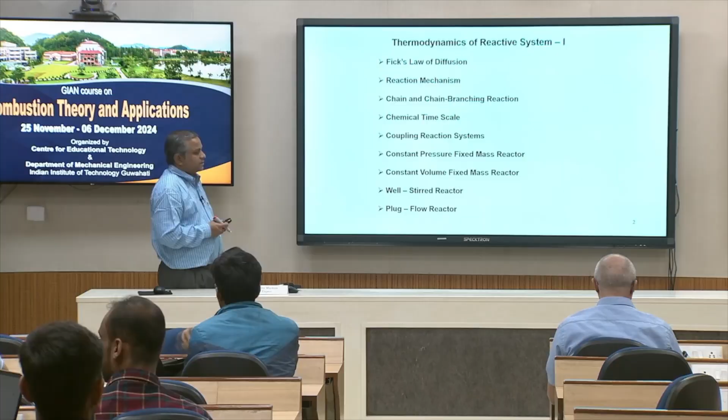In this lecture, I am going to introduce these combustion reactive systems, where we'll try to introduce other conceptual reactions which we normally call elementary reactions and global reactions.

Elementary reactions are basically those reactions that are formed during the species formations, and global reaction is what you see when the reaction gets completed as a whole. Global reactions we dealt with in our previous lecture, either a lean mixture or rich mixture, in which you find either CO or NO, or excess oxygen depending on the mixture composition.

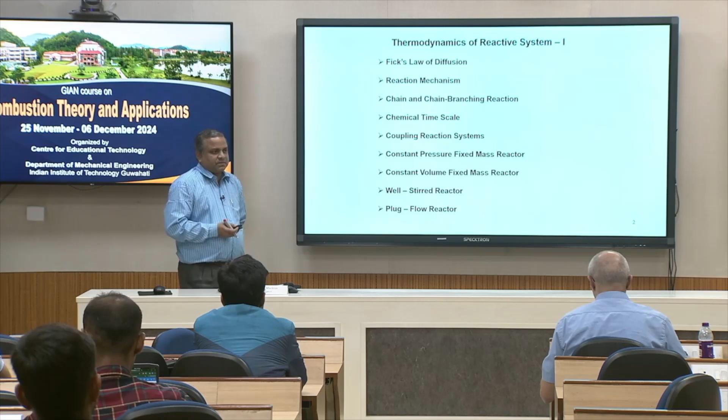This is one part of the analysis. Then the other part is we will try to introduce reaction mechanisms, which take care of how, for the formation of elementary and global reactions, we want to see what are the possible ways, depending on the pressure and temperature ambient condition in the reactor, different species are formed.

In a certain situation, whether it is favorable for CO or NO formation, the reaction proceeds based on this. In some cases these reactions are either chain reactions or the chain also gets branched, so chain branching reactions.

Next important point is chemical time scale. If you look at the instantaneous ignition event, it lasts for about a nanosecond or maybe a microsecond range, and in that ignition period the combustion takes place.

That means the entire duration of combustion, starting from fuel and air, when ignition starts, all of a sudden we see the products as a whole, which is the combustion products. But in between, the formation of products—how fast it forms—that is the question: what is the reaction time?

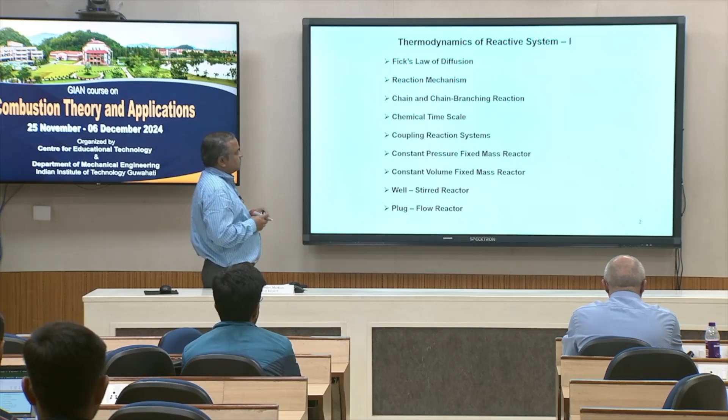Then coupling reactions—there are different ways we can model these reaction systems, and when we talk about coupling reaction systems, it is basically to analyze thermodynamic concepts for how we are going to introduce this reaction analysis.

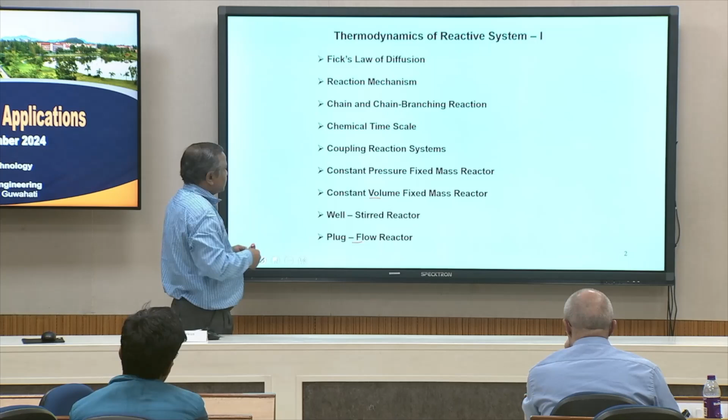One such model is the constant pressure fixed mass reactor. Other is the constant volume based fixed mass reactor. Well-stirred reactor, that means it's a kind of steady state mixing reactor. Plug flow reactor is something like when the flow is taking place in a duct, flow is moving, and at the same time we introduce fuel during the motion of the oxidizer or air. So those analytical concepts are introduced here to talk about coupling reaction systems.

But before we start all these things, the first point I need to discuss is Fick's law of diffusion, because that is the basic law that governs the mixing systems.

So in a combustion process, why is this Fick's law of diffusion important? Because it involves chemical kinetics, short duration phenomena or events that are going to happen. Second, to analyze the chemical reaction rate, and in addition to heat transfer, there is also the concept of mass transfer.

Normally in thermodynamic analysis systems, we have a fixed mass system or variable mass system, but here additionally, when species are formed, one species tries to diffuse into others. How fast can it diffuse? Diffusion is like a perfume bottle in one corner of the room, but we can smell it in every part of the room, meaning there is some mechanism of mass transfer from one end to other, and that concept we call diffusion.

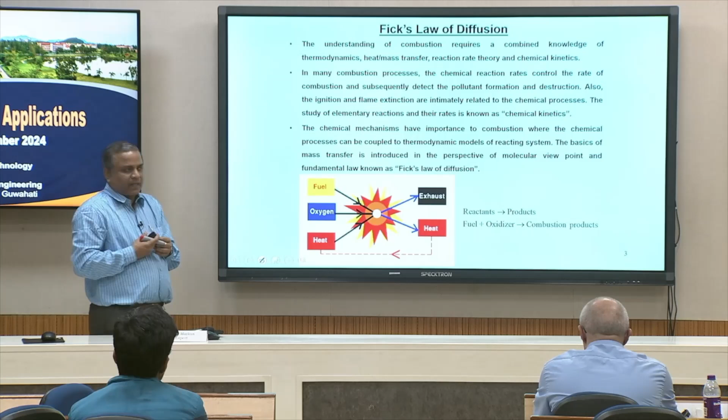When this diffusion takes place, how fast we are getting that effect is mainly based on the diffusion coefficient, and a diffusion coefficient is different for different gases, and some of these things we call binary diffusion coefficients.

So that is the basics of Fick's law of diffusion, which talks about two things: one is mass transfer, other is there are possibilities that heat and momentum transfer can take place. So mass, heat and momentum transfer will give you the complete spectrum analysis for the reaction systems. To do that analysis, mainly the mass transfer rate law for non-reacting gas mixtures is governed by Fick's law of diffusion.

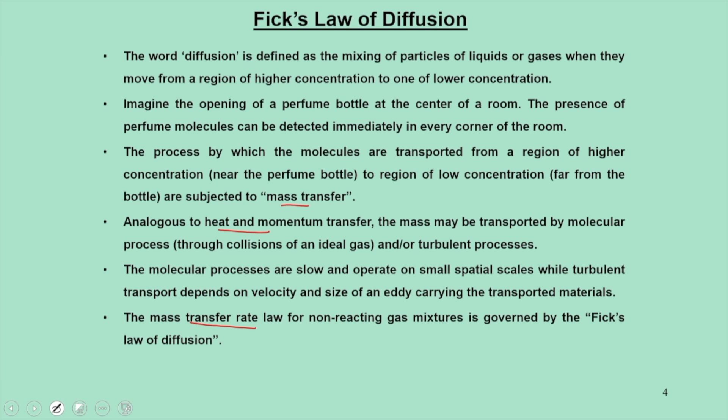So here we are trying to explain the importance of Fick's law of diffusion. When you try to see the conventional mass balance equation, this Fick's law of diffusion is basically during combustion reactions, some species are formed, some species disappear, so many permutation combinations are done. Through this process, the conventional mass balance equations get modified.

Those modifications are introduced because there are two things we are going to see for mass conservation: one is mass, other is species. Species also form and disappear, but that identity of the species has to be there throughout. So first we define Fick's law in a manner that

it says that if there are two species, basically here we are talking about binary diffusion coefficients, in which we talk about diffusional fluxes. The flux is nothing but the mass flux calculated with respect to unit area perpendicular to the flow.

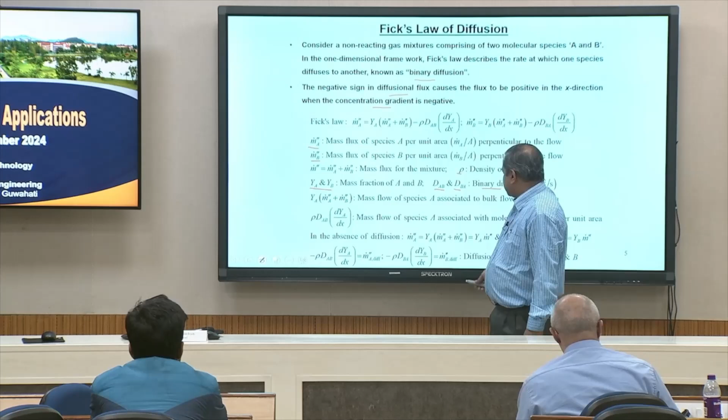The same mass flux species - this is the mass flux, but this is the diffusion flux, which comes due to the concentration gradient, and it is a function of density, which is of the mixture, and binary diffusion coefficients, whether it is A to B or B to A.

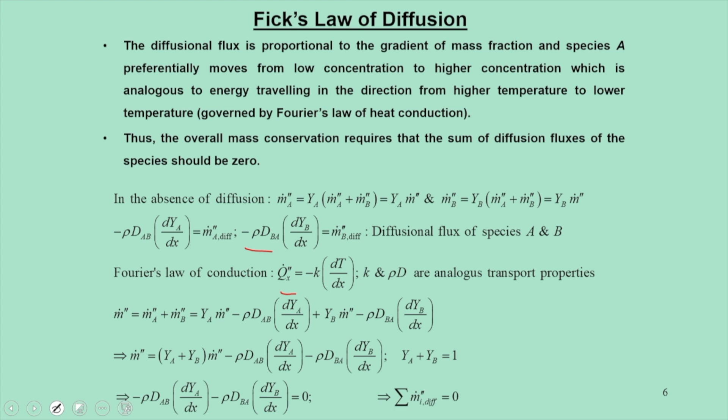These equations get further simplified, and if you try to make an analogy between Fourier's law of heat conduction equation and the diffusional flux equation, we start with Fick's law, and this gives another equation which is the diffusion flux equation, which has some analogy with the heat conduction equation. If you compare them, the terms are similar, and since heat transfer always takes place from high to low, there is always a negative sign here, and here also higher concentration to lower concentration.

With some mathematical combinations, ultimately what we end up with is that when you say total mass is conserved, here also it gives another equation that total diffusion flux mass is also conserved, and this equation is always valid.

So when we talk about combustion equations for conservation of mass, one is we have to also say that the diffusion flux equation also gets satisfied, which means the total amount of species that are formed also nullifies what goes out.

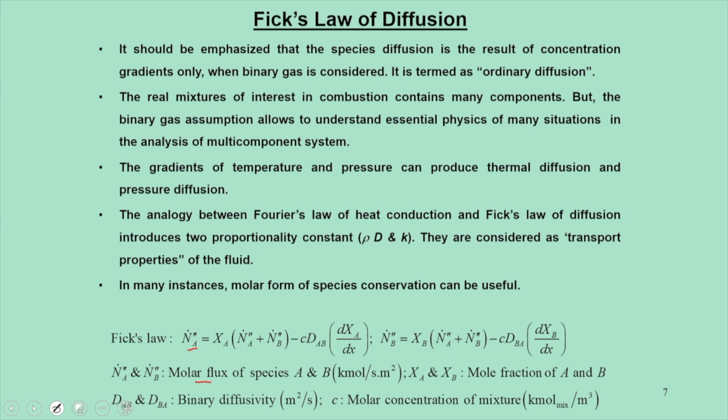Through this, what I have told in these previous slides is based on the mass flux observations. One can also think of Fick's law in terms of molar analysis, where we call it molar flux. What remains the same - instead of mass in kg, we are talking in terms of kilomole or mole - and the equations remain the same.

Then we enter into the next step, what is called reaction mechanisms. There are two types of reactions: global reactions and elementary reactions. The first part is the global reaction, meaning if you start with the basic things like fuel and oxidizer, they give the combustion products.

When you talk about chemical kinetics, we are more interested in the rate at which the fuel is consumed. Since the fuel is consumed, its concentration comes down, so there is a negative sign here. This is the rate chemical kinetic equation showing how the fuel gets consumed, and this equation is normally expressed in this form.

Here we introduce one term called the global rate coefficient Kg, which is a function of temperature. Notice that the concentration of fuel drops and oxidizer also drops, and this concentration raised to the power exponent gives the rate at which the fuel gets consumed.

One thing to be noticed here: when you say second order, third order, the terms M and N relate to the order of reactions. How do you decide the order? If the reaction is of nth order with respect to fuel and mth order with respect to oxidizer, then the overall reaction order will be n plus m. So just add 2 plus 3, 3 plus 2 - it's a fifth order reaction, second order reaction, first order reaction. That way we make a judgment about the order of reactions.

Now to analyze such reaction mechanisms, they are standardized into three categories: unimolecular reaction, bimolecular reaction, and termolecular reaction. Unimolecular means species A gives species B - a single reactant gives a single product, or a single reactant can give two or three products, that doesn't matter. This is mainly true when you talk about these elementary reactions.

For example, O2 can give you O plus O. Hydrogen can decompose to H plus H. These are the kind of things which are unimolecular.

Bimolecular reaction means two species try to combine. So H2 plus O2 can form this way, or H plus O2 can form this way, OH plus H2 can form this way. There are many possibilities like this, and each reaction will have some term associated with it called the rate coefficient.

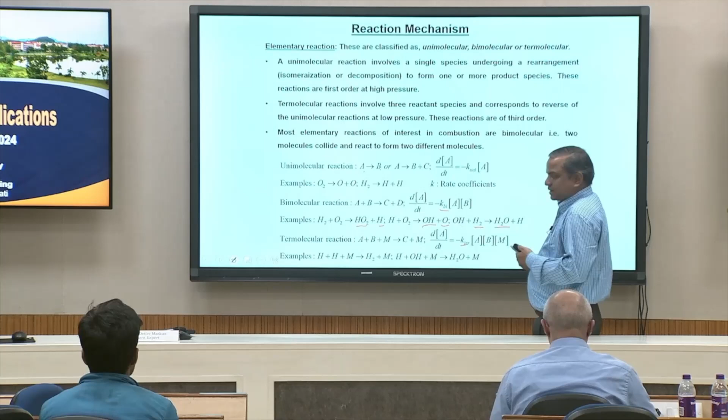Depending on whether it's unimolecular, bimolecular or termolecular reactions, we can find the rate coefficient for each reaction. This is actually required at the intermediate level, just to know how fast you expect the reaction to happen, and this judgment is needed to determine how much time it takes for combustion to go from flame mode to non-flame mode to detonation. All this analysis is required.

Another important aspect of this chemistry is the Arrhenius equation. This is a very standard equation that gives the overall picture, and it is mainly an experimental observation. It has been found that this equation is true mostly for bimolecular reactions. Based on this, it is standardized in this manner.

So if it is a bimolecular reaction where A plus B gives C and D, we can define K, which we call the rate coefficient. Now what is this rate coefficient? There are possibilities that you can do some measurement in that scale through experimental observations.

But Arrhenius proposed a model in which K(T) was defined in an exponential manner. He proposed that the rate coefficient mostly depends on temperature. The reaction ambience depends on both pressure and temperature, but his proposal was that the temperature dominance is more as compared to pressure.

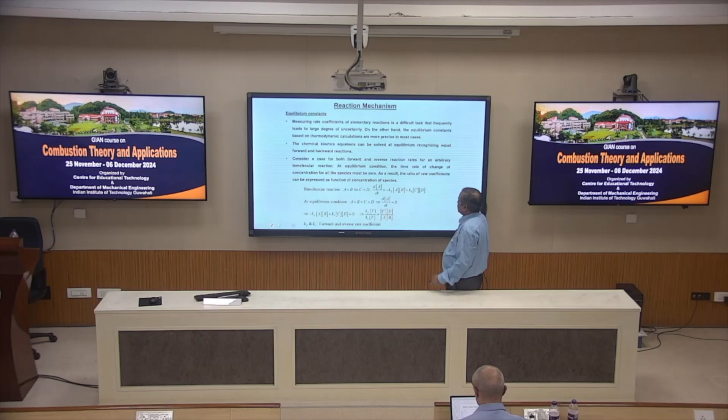Now apart from this, we are going to introduce another term called the equilibrium constant. So there we said it's the rate coefficient; now we are going to introduce the equilibrium constant. To define this equilibrium constant, we again take a similar type of bimolecular reaction.

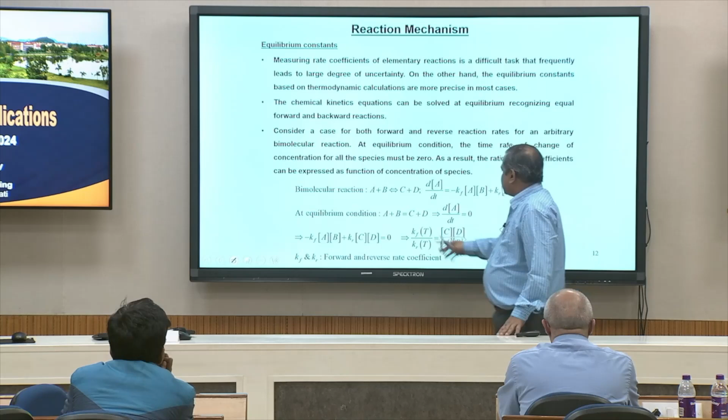Here the reaction can happen in both directions: A plus B can give C plus D and vice versa. So it is a reversible reaction. For a reversible reaction to happen, what we see is that when the reaction is moving in the forward direction, the concentration of A and B drops.

Accordingly, the rate coefficient in the forward direction is negative. If the same reaction goes in reverse, it is positive. This essentially means that during a reaction some species are formed, but they cannot remain in that stage because continuously, temperature and pressure don't allow them to react further with others, so they try to reverse back.

So in those cases, in one particular situation, this equation can be modeled under equilibrium conditions, using the concept that the concentration of A with respect to time is zero. Based on this we can frame a linear equation consisting of the concentration of each species with respect to the ratio of rate coefficients in the forward and backward directions.

Now, since for a given reaction both of these are functions of temperature, people try to interpret this in two ways, either as Kc or Kp. This means in one case we are saying the reaction takes place at constant concentration, or at constant pressure. That's how Kc and Kp are defined.

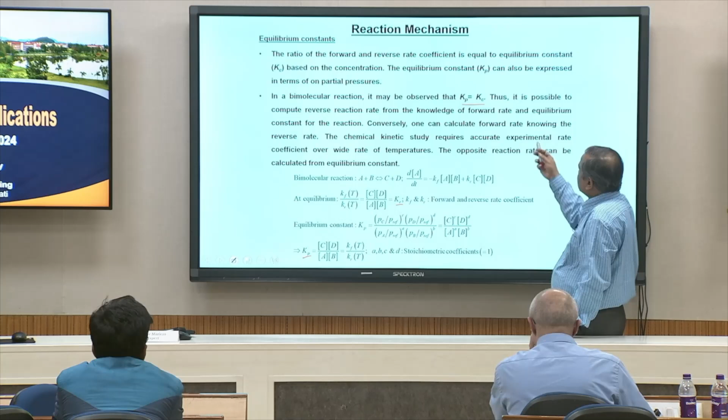But in a reaction, maintaining pressure is a better solution because we can control it, whereas we cannot control the concentration. So for most practical purposes, it is the constant pressure approach which is followed to find this equilibrium constant.

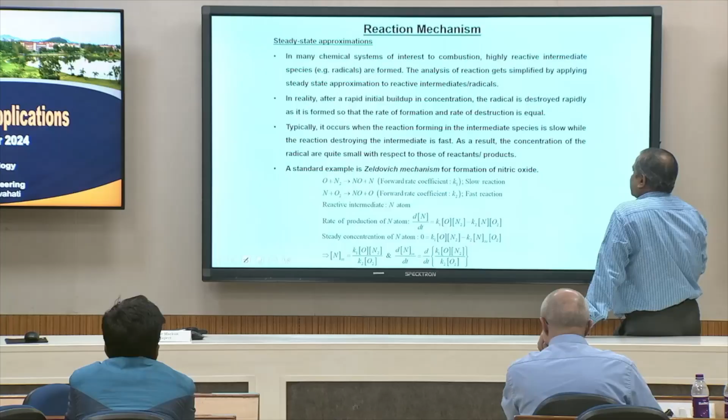Another kind of reaction mechanism uses the steady state approximation. This means that for certain reactions we do not bother about how the reaction moves forward or backward, but about the concentration of one particular species during a reaction. We often do not bother about intermediate phases or concentration changes, but about one particular case.

For example, for this reaction, if you try to see the rate of production of nitrogen atom using the previous concepts, the reaction proceeds in either way. That way the first equation can be found based on the rate coefficient, and when we have a steady state concentration of nitrogen, if this number turns out to be 0, that is an approximation.

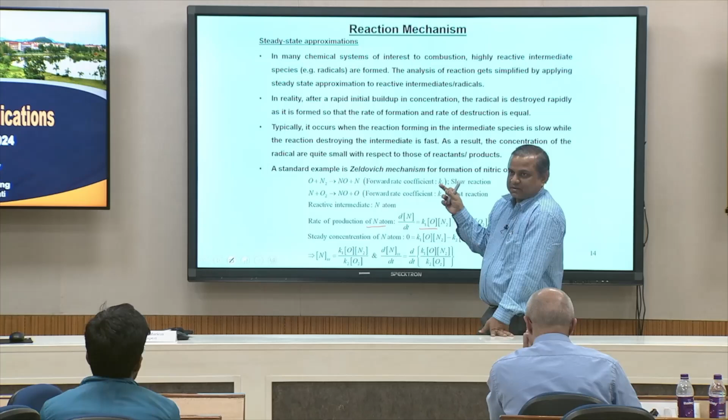So we are not looking at the reaction formation at any timely event, we are looking at steady state concentration, meaning during a steady state, how fast the nitrogen drops instantaneously. We are not really bothered about instantaneous changes. During a certain time frame we look at the average concentration. That way this equation can be modeled in this manner.

So we get the steady state concentration of nitrogen. Instead of bothering about dN by dt at every time instant, we are really bothered about what is dN steady state concentration with time. This is an easier way of handling these equations.

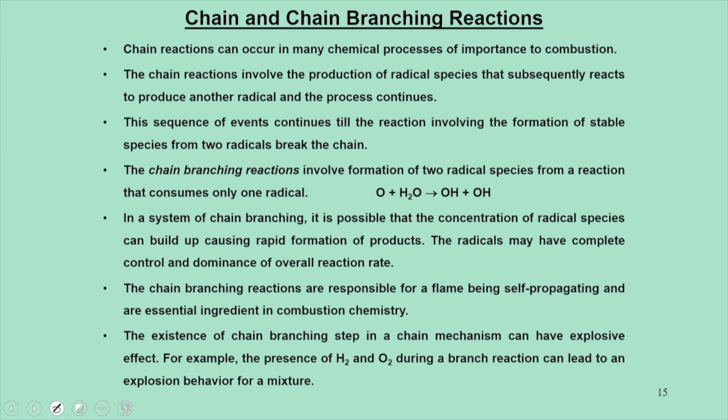Then we will try to move to a kind of reaction, and most combustion reactions are chain reactions. These are very short duration events, like chain reactions. They occur in many chemical processes, and another thing is that we introduce the term called chain branching reaction. It is often possible that concentration of one radical species can cause rapid formation of products.

Why do we say chain reaction? Chain reaction means how fast the reaction proceeds. Why does this reaction proceed? Because of the presence of a certain, maybe you can say, radical. That radical actually accelerates the process. Through these things one can call this a chain reaction, and this a chain branching reaction.

The analysis of both these reactions becomes very vital to understand combustion systems. To introduce some things like how we can say whether there is a chain reaction or chain branching reaction, there are basically three categories. If you have a global reaction in this manner, we can say when the pressure and temperature ambience is created...

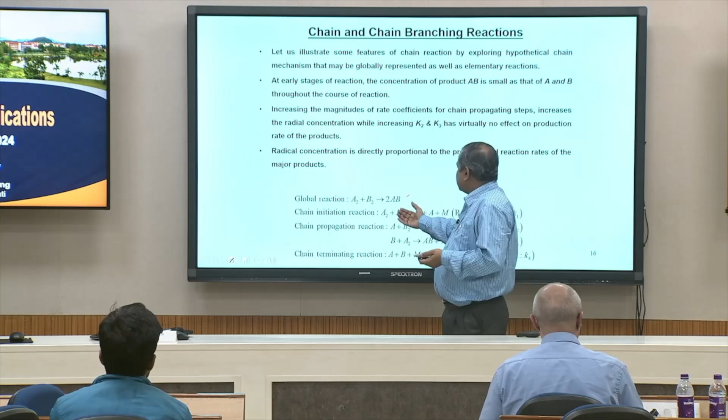A2 tries to mix, some molecule is formed, A2 tries to mix with this and it tries to dissociate. Why does it dissociate? Because this M is there, otherwise it would not have dissociated. So this is what you call the chain which starts initiation. So when it initiates...

Finally when the chain has to be terminated, because once AB is formed, at that point AB doesn't form all of a sudden. A becomes A2 becomes A plus A, plus B2 can become AB plus B, maybe A2 plus B can have this, and each reaction will have different rate coefficients. Why is it initiated? Maybe the presence of certain molecules, which may be a radical or a catalyst. So that way we interpret that radical concentration is directly proportional to the pressure and reaction rates of major products.

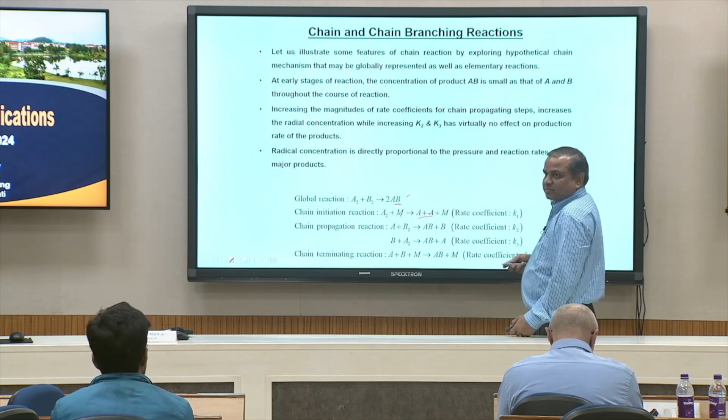Then we will try to introduce the term called chemical time scale. Every event, every reaction takes place for a certain duration. Once an event starts it has to complete, so there is a duration for which we define the time scale. With respect to these reaction mechanisms, the time scale duration is hardly within milliseconds. This is quite clear when you think about the combustion process in engines.

Now mathematically, how do you interpret this? What we call chemical time scale is nothing but a characteristic time, chemical time, required for any species concentration to fall from its initial value to a value equal to 1 by e times its initial value. If we interpret these things in this manner, some species concentration drops down with time, and how it drops down depends on its rate coefficient.

With further simplification, if you integrate this equation, we write it like this, and here we introduce an integration constant which is nothing but its initial concentration. Based on this we define a parameter called the chemical time scale, such that at any instant, if you multiply the concentration value by its time scale and take the ratio with respect to its original concentration, you get a value of 1 by e. So this is the definition of chemical time scale.

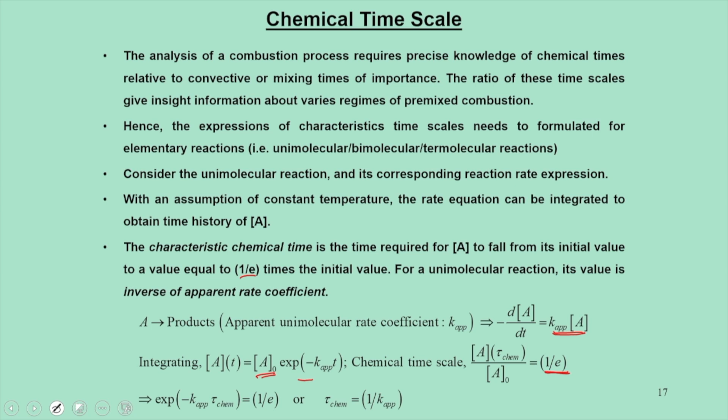In other words, instead of rate coefficient, the chemical time scale for a reaction can be written in this manner. This is for a unimolecular reaction. There are also expressions for chemical time scale for bimolecular and termolecular reactions, expressed in this manner. One can use this concept to find out the chemical time scale for reaction events.

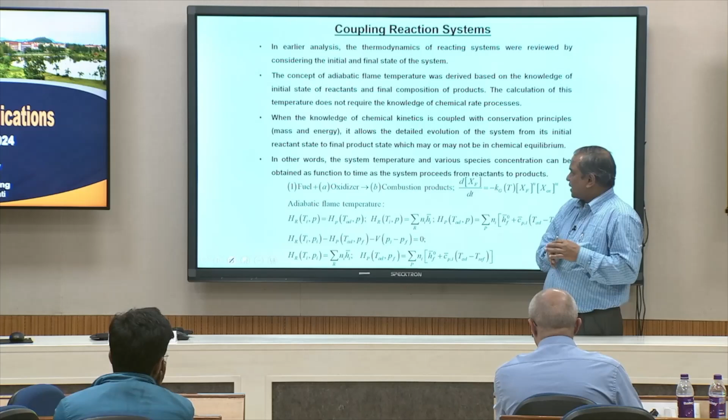Then we look into these reaction systems or coupling. By coupling, I mean that for a given reaction system, in our previous study we talked about the thermodynamics of mixture, then introduced into the combustion systems. But that story doesn't end there, because that's a thermodynamic analysis of a chemical system.

We have not introduced kinetics into that study. Although we take it as steady state analysis, this chemical kinetic event is not introduced. So when you try to do this study in a full-fledged manner, what we call combustion modeling, we have to introduce chemical kinetics of a reaction, based on the standard equation of how the concentration of fuel drops depending on the order of reaction, and with respect to other terms, the calculation of flame temperature, adiabatic flame temperature, and calculation of enthalpy of products and reactants.

So when you couple these two equations to make a complete model, that is called coupling of reaction systems. We introduce Fick's law of diffusion for the species equation, we introduce chemical kinetics of the reactions, and we already previously studied how to model combustion systems thermodynamically. When we integrate everything together in a single domain and try to solve them simultaneously, we call this modeling coupled.

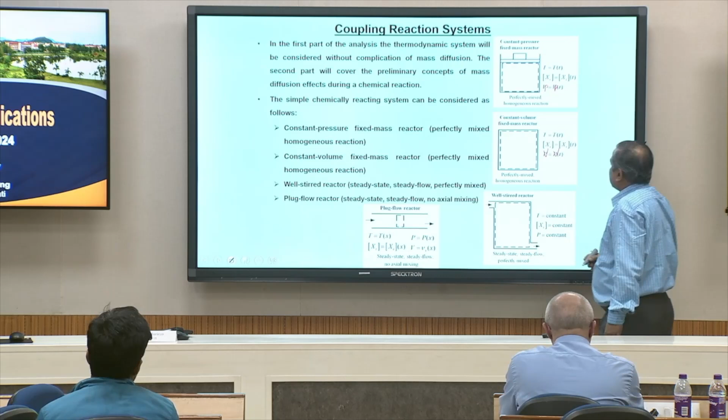Then we call this a constant pressure fixed mass reactor. This would be P, constant pressure, fixed mass. This is constant volume, P as a function of time. So the assumption lies here: whether pressure is constant or volume is constant. This is one category which is normally used in most of the analysis.

There are some situations which we call a well-stirred reactor. This means that in a given system, mixing takes place—fuel-air mixing takes place within the reactor—but simultaneously the fuel or air is fed in from one end and products go out. This is another kind of modeling called a well-stirred reactor.

Another case is what we call a plug flow reactor. Many times this is something like a piston-cylinder concept—a kind of open system analysis. In some cases, we feel that air is moving and fuel is being injected simultaneously. For example, air is flowing in a duct.

We can imagine injecting fluid circumferentially, which means there is no axial mixing. At various locations we can inject fuel, so it's circumferential mixing. First the mixture is formed, and we can put the mixture and allow it to flow through. Such duct flow analysis is mainly used for high speed engines, like ramjet and scramjet concepts. Air normally enters a duct intake, and mixing takes place as fuel is inserted into the duct circumferentially at various locations, and through this mixing process we try to ignite.

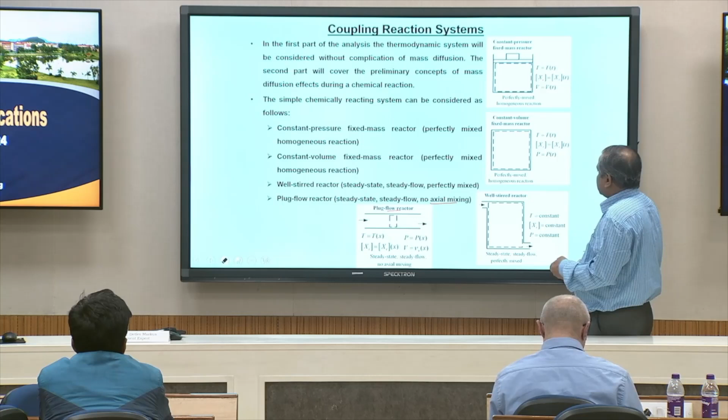If we go bit by bit into this modeling, we need to develop the governing equations for this constant pressure based fixed mass reactor. Another point to note is that combustion reactions are mostly exothermic. During these exothermic reactions, temperature and volume increase with time, and we also look into heat transfer. The main motive of this analysis is to find, at any instant of time, the temperature and species concentration.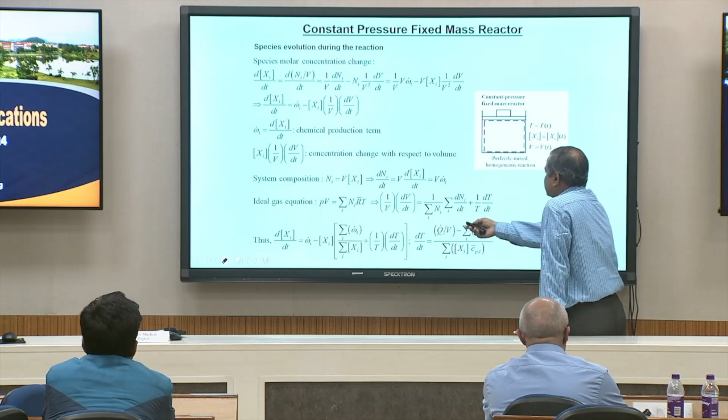Ultimately the solution for this equation boils down to particular expressions: concentration for any species i during a reaction, and temperature with respect to time. These two equations have to be solved simultaneously to arrive at the final conclusion, because the thermodynamic equations are mixed with chemical kinetics, and those chemical kinetics, with respect to concentration, require information on equilibrium constants. Those things are already introduced here to find these two important equations.

In a similar way, we also arrive at the equations for the constant pressure based fixed mass reactor: one for how temperature changes with time, and another for how concentration changes with time. We are not going more into this.

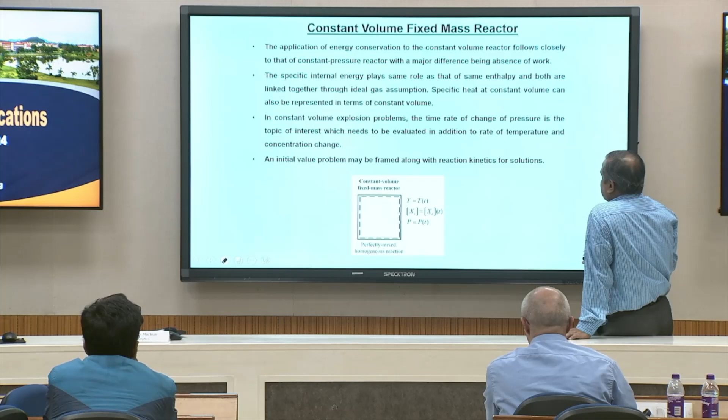Moving to the constant volume based fixed mass reactor, here we use the same equations, but with the assumption that since volume is constant, we are more interested in internal energy. That internal energy information we can get from enthalpy, as we did in the previous case: with constant pressure based analysis you find enthalpy, then using this equation arrive at the internal energy calculations.

By doing so, we have one equation for how temperature changes with time, and another for how concentration changes with time. In most cases, constant volume reactor modeling is very critical because, since volume is fixed, we do not know how fast or what magnitude the pressure rises within that container.

So there is a chance of explosion, and here the word explosion comes into picture. When we do analysis for explosion, it has to be with respect to constant volume, so that we are actually simulating a situation of explosion. When you say explosion, you are trying to see how pressure varies with time, and that equation again comes from the temperature calculations. This equation finds application during an explosion process.

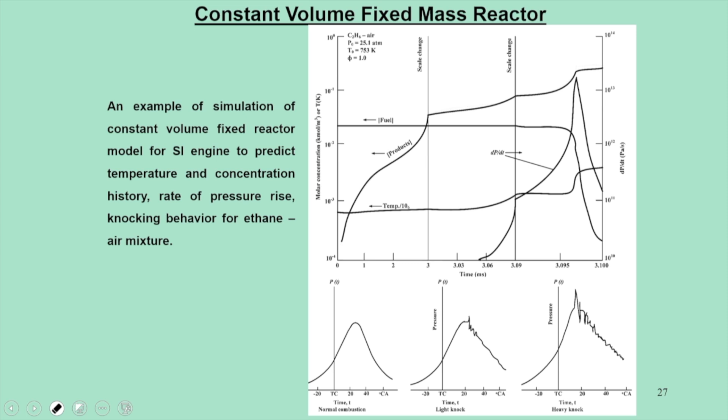This behavior is significant because although we don't really look into the chemical kinetic aspects of the reaction, ultimately what you see during an experimental process for an SI engine is how pressure rises with time, and for normal combustion the curve should look like this.

If it is a knocking case, the curve gets an erratic behavior. Why this erratic behavior? Seeing this pressure trend, we say it's erratic and it tends to give you knocking. But why does this knocking happen? It happens because of how the pressure variation takes place in that modeling.

In this case it's a constant volume based modeling. So this gives an indication of how you control your charge, or fuel-air charge, or concentration, such that you get rid of this knocking behavior.

So the main intention of showing this graph is that all these graphs are not just experimental observations. In the background, there is some combustion modeling that happens, and we can also model that behavior in this manner.

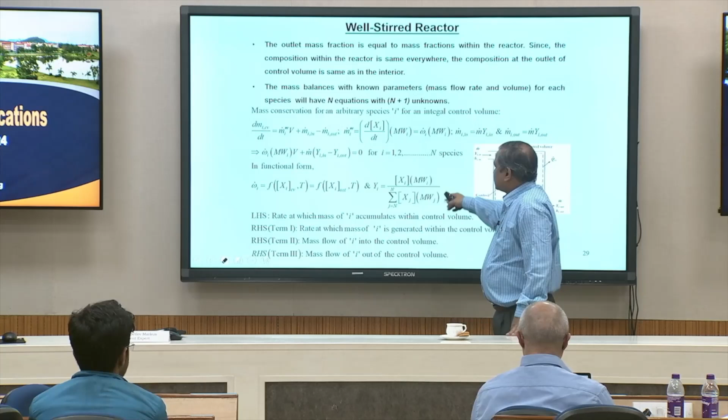Ultimately we get these things from mass balance. Another equation we can frame is the heat transfer balance, and here one thing we consider is the mean residence time of gases in a reactor.

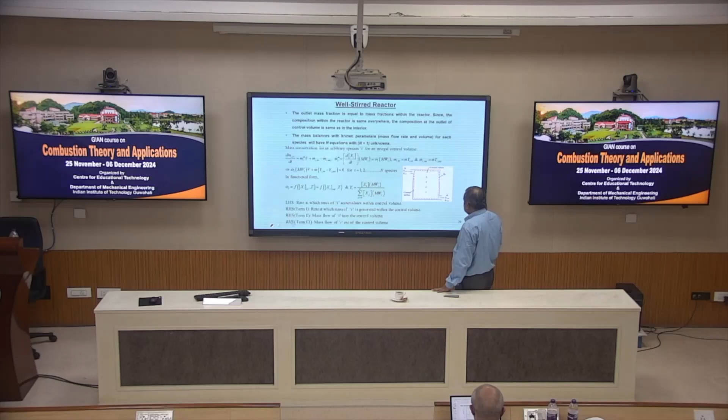So what it means is something comes in and something goes out. Any gas formed during the reaction process - what is the minimum time it stays here before it gets out? That term is calculated by a number which is the global parameter of the mixture, involving density, volume, and mass flux.

And density we can find out from the ideal gas equation: P, molecular weight, and RT.

So in a plug flow reactor, I am not going into details there because that analysis is complicated - it's a very short duration time scale event, in which mixing as well as combustion take place simultaneously.

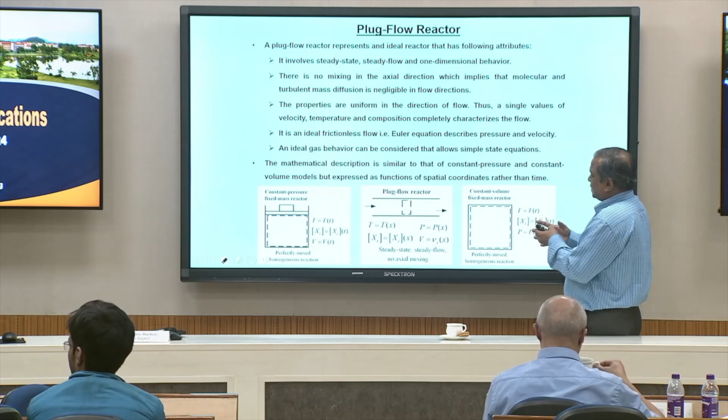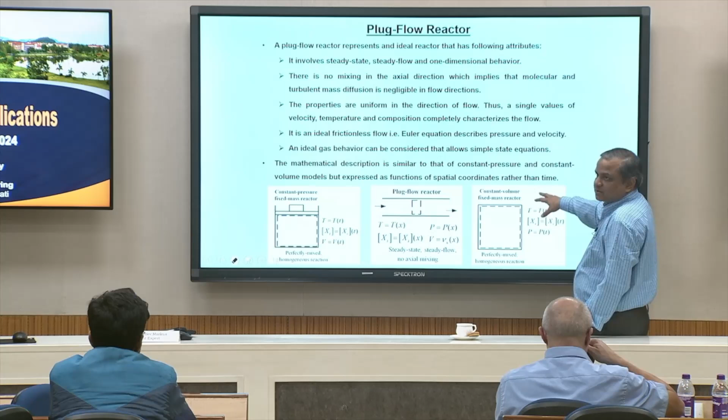So in previous studies we first think about whatever instant the fuel is injected here, and the information at that state. Those informations are completely different because of the formation - the analysis is based on flame and non-flame mode, diffusion flame mode.

But here it is not that way - it is the formation of shock waves because of the flow of air entering into the duct.

So to give a global picture of how a plug flow reactor analysis has to take place, one has to think about the mass flux equation, species flux equations, energy equation, and momentum equation.

By studying these things in a complicated manner, the analytical modeling from previous thermodynamics analysis will not work out. We also have to link gas dynamics analysis into this - classical thermodynamics principles will not work here.

We also have to talk about the effect of shock waves in terms of pressure and temperature rise into this reaction system.

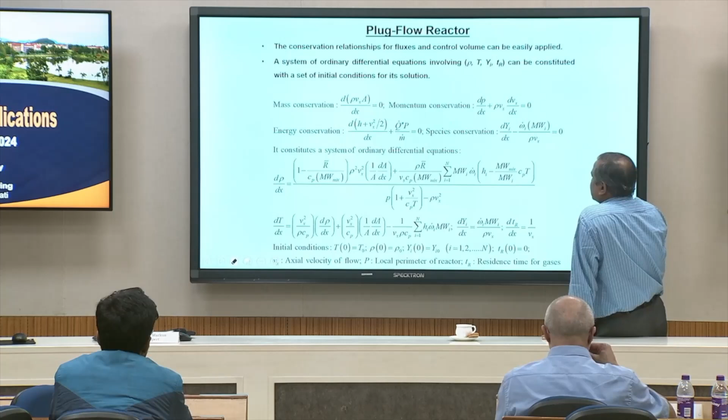So this is all I need to talk about, and these are some sample problems based on our understanding over these lectures. One case we talk about is ignition delay calculations using well-stirred reactor systems.

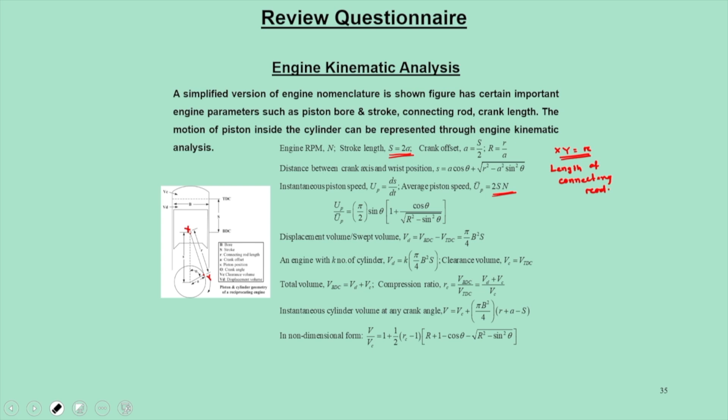Here we try to introduce piston-cylinder concepts to calculate - this is the standard equation for engine kinematic analysis for IC engines. In this engine kinematic analysis, we are more interested in how the total volume changes with clearance volume, which is a function of compression ratio and other engine parameters. So these equations we are going to analyze here to calculate the ignition delay and fuel cutoff studies.

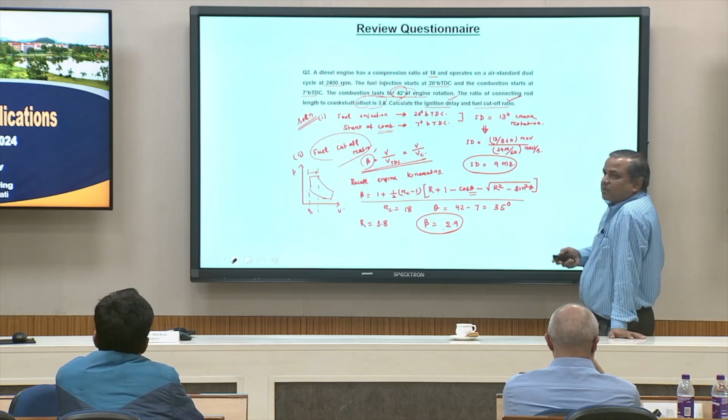These terms I will come back to when we deal with fuels, ignition delay, and all these things. But what I am trying to say is that the engine nomenclature has a definite bearing in terms of the ignition calculation and thermodynamic analysis for the reaction systems.

So what exactly is film cooling and why do we use it? Components that are generally under the pathway of hot flue gases, like the gas turbine blade, the afterburner of an aero engine, and the nozzles, are subjected to very high temperature. To protect the component from high thermal stress and failure, we generally eject a coolant through a surface hole, which forms a thin protective layer over the surface and prevents direct exposure to the hot flue gases.

In order to increase thermal efficiency and power output, the inlet temperatures of gas turbines have increased significantly over the past few decades. To protect all components like the combustion liner, the afterburner, and the gas turbine blade, we eject a coolant through the surface. The coolant may be air, kerosene, or any other fluid that is at a relatively lower temperature.

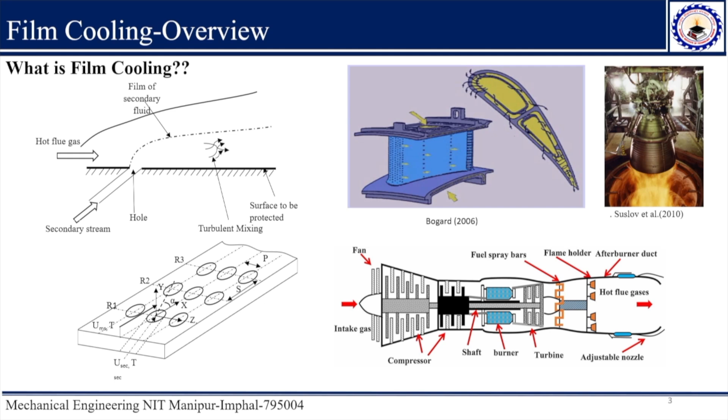This is the history of turbine blade cooling. In the early 1960s, metal temperature was not very high, so there was no need for sophisticated cooling techniques. After 1970, there was a necessity for cooling. Film cooling and other cooling techniques, like regenerative cooling and other conventional cooling techniques, evolved. Nowadays, among all cooling methodologies, film cooling is the most commonly used technique to protect the metal from hot flue gases.

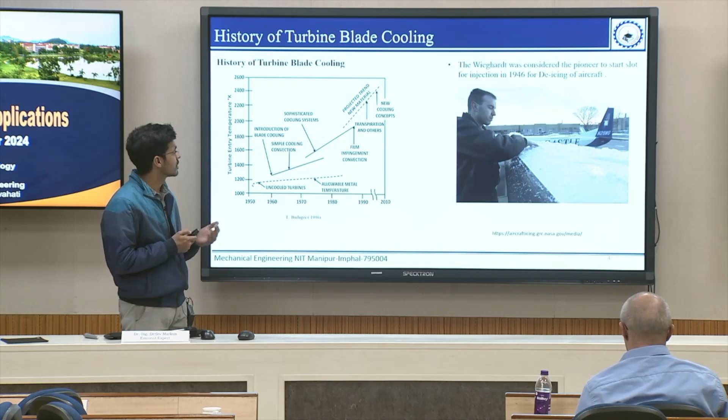The history of film cooling: the idea was generated in 1946 by Wieghardt, which was used in high altitude aircraft facing the issue of ice formation. To melt the ice, he suggested injecting hot air, and from there the idea of film cooling was generated.

These are the common factors which affect film cooling performance. Mainly we have geometry related parameters like the shape of the hole, ejection of the secondary stream, the angle at which the secondary stream is ejected with the main stream, and the shape of the hole. We have different kinds of ejection holes, and the surface geometry may be aerofoil shape, corrugated, or flat surface. Depending upon that, the stability of the film cooling depends.

Other parameters include the blowing ratio, which is the mass flux of the secondary stream to the main stream, and the density ratio, which is the ratio of the secondary stream density to the mainstream density. The third parameter is the mainstream flow Reynolds number, or the hot flue gas Reynolds number, and then turbulence intensity. These are some common parameters which affect film cooling performance. There are other parameters on which film cooling depends, but these are the common ones.

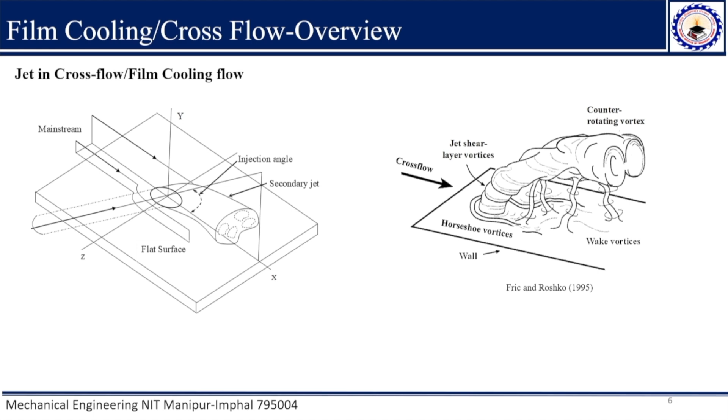Next is the jet in cross flow, which is closely related to film cooling. Whenever a secondary stream enters into a cross flow region, due to the pressure difference and combined effect of pressure and shear, the secondary stream is split into two counter-rotating vortex pairs, commonly known as kidney vortices.

These kidney vortices increase mutual induction and cause the lift-up of the coolant from the hot surface, degrading the cooling performance. With this cartoon one can see the number of vortices commonly generated for the jet in a cross flow.

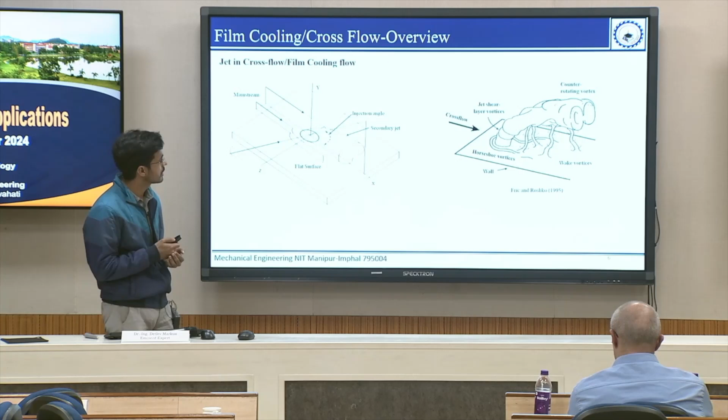So the horseshoe vortices are basically generated near the secondary stream, and the wake vortices are in the wake region, initiated from the surface itself and extended up to the counter rotating vortex pair, while shear layer vortices accompany the counter rotating vortex. So these shear layer vortices and wake vortices are the unsteady vortices, and the counter rotating vortex pair and horseshoe vortices are the steady vortices.

So coolant ejection hole shape: different holes were generated as time passed. Initially film cooling started with slot ejections, but due to the slot there was a sufficient decrement in material strength, so it was preferred to introduce cylindrical hole ejection. But as shown previously, because of the mutual induction of the kidney vortices, there was a coolant lift-off issue with the cylindrical hole.

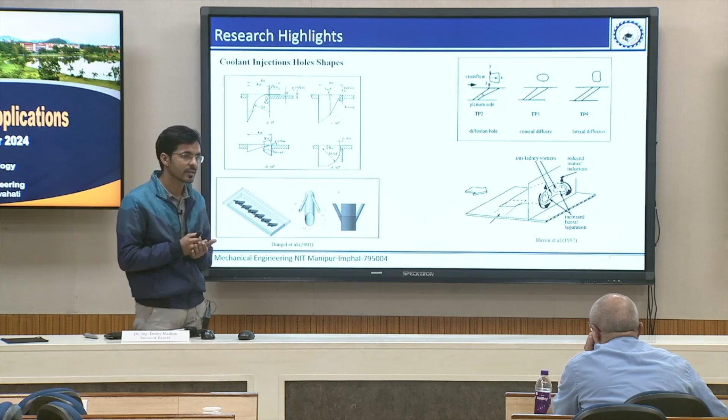Then the shaped hole was introduced by Haven. In case of the shaped hole, the hole diverges in both lateral and mainstream flow directions, and because of that an additional pair of vortices are generated, which counters the effect of the kidney vortices. So basically the jet lift-off is completely mitigated by introduction of this shaped hole.

Another way to mitigate the effect of kidney vortices is branching of the hole. In case of branching, there's a main stream, a main hole, and side by side two branch holes. So the side holes also generate vortices that nullify the vortex formation seen in the cylindrical hole.

And this is the setup I designed during my PhD at NIT Manipur. The setup consists of a subsonic wind tunnel facility, an open circuit wind tunnel, with mainstream and secondary stream flow.

In case of the mainstream flow, it is basically heated air, so we use electrical heaters to heat the mainstream flow, through the flow straightener and test section the mainstream passes, and through the pressure regulator and mass flow controller, the secondary stream, which is at lower temperature or ambient air, is supplied into the film cooling surface.

So this is the picture of our actual setup. This is the mass flow controller and the pressure regulator, and the setup was insulated with styrofoam and glass wool to maintain uniform temperature throughout, because there was temperature loss, and we have installed electrical heaters also at the front of the test section.

This is the calibration curve for the boiling water for the IR camera. The IR camera was first calibrated with a thermocouple. To calibrate the IR camera we use a copper tank, painted with matte finish black paint, and the IR camera was focused on one portion of the black finished copper tank, which is filled with boiling water, and the water was boiled using a resistance heater.

The other side of the wall temperature is measured by the thermocouple. The thermocouple was fixed at the other side, and the one side temperature was measured using the IR camera. Once the water was heated, it was allowed to cool, and with the passage of time the temperature was recorded through the IR camera as well as the thermocouples and plotted for the cooling of the water.

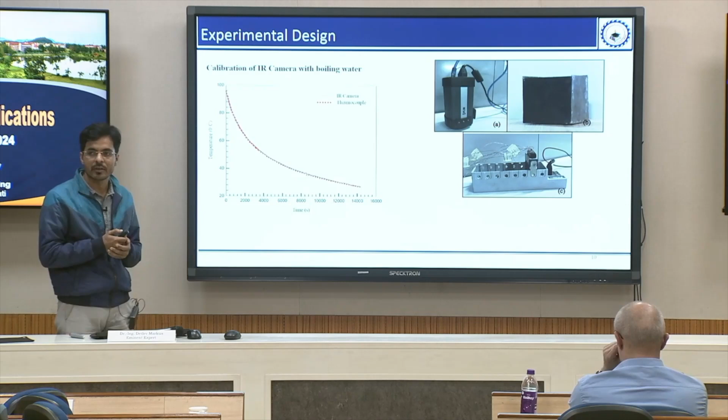And this is the comparison of the thermocouple measurement. Generally we calibrate the IR camera readings with the thermocouple before going to take measurements from the IR camera.

These are the positions of the thermocouples. Near the hole region there is a high gradient of temperature, because mainstream and secondary stream are mixing. The mainstream is at high temperature and secondary stream at low temperature, so the temperature gradient will be high just downstream of the secondary hole.

As we move in the downward direction, the secondary stream will be completely mixed up with the mainstream. So accordingly the thermocouples are arranged in the downstream direction from the jet to the secondary stream to further downstream directions. We compared the measurement of the IR camera and thermocouple measurement for the flat plate.

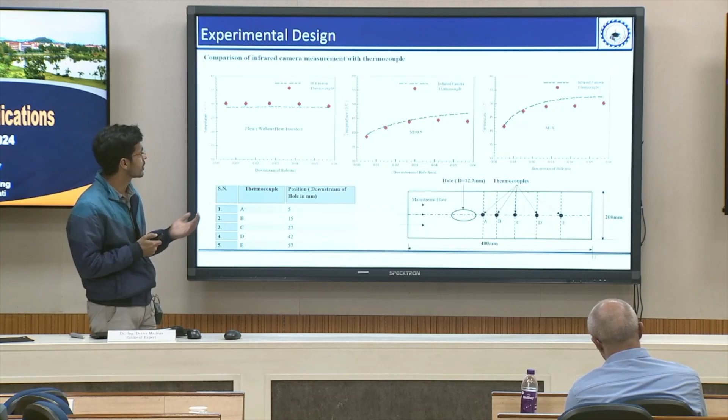And this is how we do the uncertainty analysis. So for a sample case we got 12% uncertainty, and this is basically the effectiveness formula: T main stream minus T wall temperature, and T main stream minus T secondary temperature. Both main stream and secondary stream temperature we measure with the thermocouple, and the wall temperature we measure with the IR camera, which has a resolution of 320 by 240 pixels.

This is the uncertainty of the individual instruments, like flow uncertainty from the pitot tube and mass flow controller, and the temperature uncertainty recorded by the IR camera and thermocouples, which are basically 2 degrees and 0.5 degrees respectively.

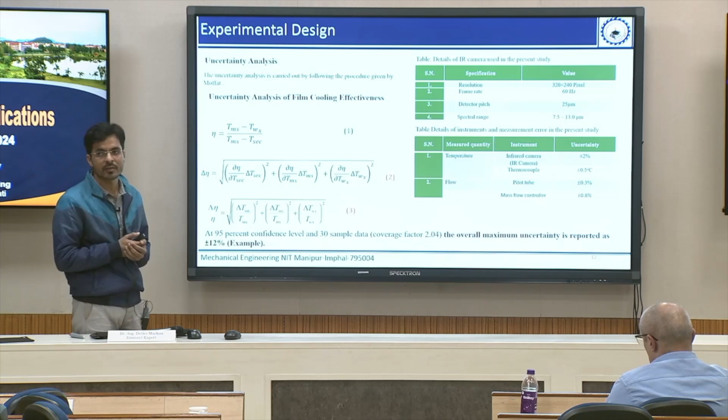This is the numerical modeling. We have a lot of options for numerical modeling, and we can use anything from the RANS model to the DNS model for modeling the film cooling problem, based on the adaptability and accuracy required. Whenever we require capturing vortices and other sophisticated flow physics, we go for higher order turbulence models like LES, DNS, or unsteady RANS. But sometimes the domain size is bigger, so computational cost and time increase, so we prefer RANS. In our study we have used both RANS and LES models.

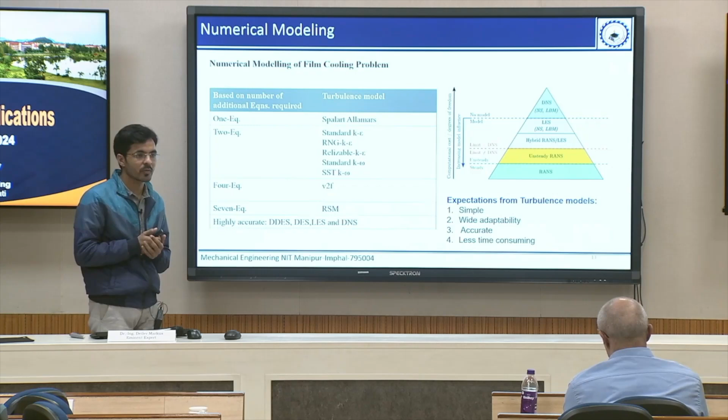This is the accuracy basically of the modeling approach. If we are using the DNS model, it will resolve all the eddies, and if we are using the LES model, only some extent of the eddies will be directly resolved, and some portion of the eddies will be modeled.

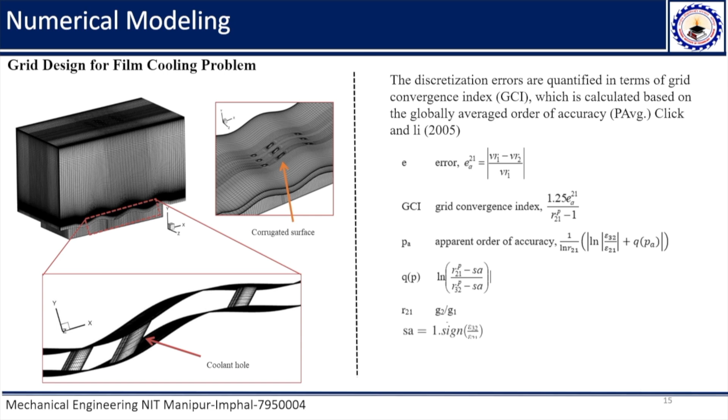This is the structured mesh basically generated in ICEM, and this is the way we calculate the grid uncertainty. If we have a refinement factor like R21, between grid 2 and grid 1, two different grids, we use that refinement factor to find the grid convergence index, like GCI, based on the apparent order of accuracy.

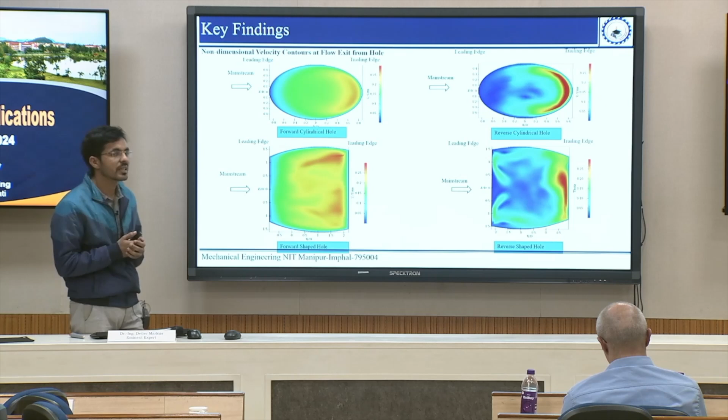These corrugated surfaces are highly used in the afterburner of aero engines. During specific situations like combat takeoff and takeoff from a short runway, an extra amount of fuel is burned in the afterburner, which is generally situated at the rear end of the aircraft. In that condition, due to burning extra fuel, there is a significant rise in temperature in the afterburner section, around 200 to 300 Kelvin.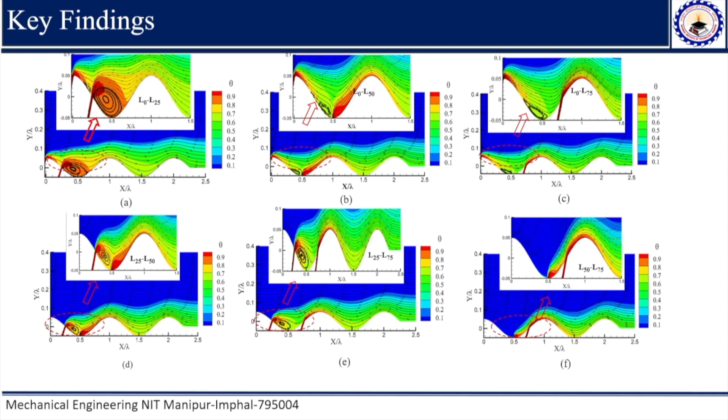This is another study we have done, basically on a corrugated sinusoidal surface, using forward and reverse ejections. This was also an experimental and numerical study, and this is the result.

In the forward ejection, you can see kidney vortices forming in a plane perpendicular to the mainstream, which is completely mitigated with the reverse ejection. You can see planar vortices generating in the plane of the corrugated wall, and the vortices are absent in the wall normal direction.

Based on the temperature profile or thermal protection we are getting through this film cooling analysis, we have also done thermal stress calculations. Because the reverse ejection is better compared to forward ejection, on both the flat surface and corrugated surface, there is a significant reduction in thermal stress.

These are the publications we have done in this area. These are the work from my PhD thesis and master's thesis, both basically on the film cooling area, and presently I am planning to work in multi-phase flow heat transfer, fluid solid interaction, and combustion.

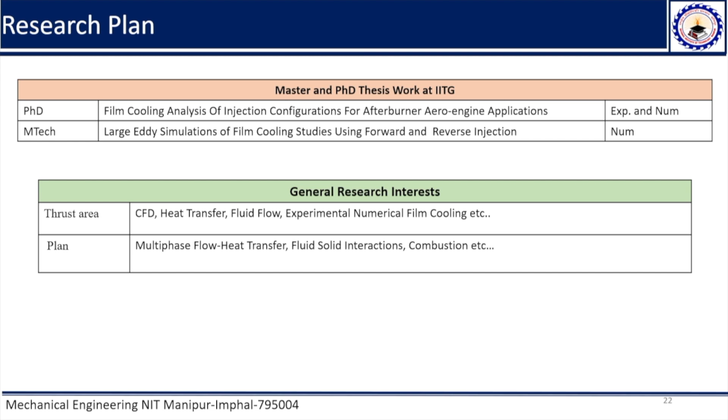Actually we have not done the experiment on the blade, we have done it only on the flat and corrugated surface. In the experimental work, we have shown the possibility in the back slide.

No? This is the flat surface. This is just for showing the possibility that you can measure the blades also. I just didn't understand. This is the blade profile, and the holes, approximately where you have placed them.

Actually I have not done a study on the blades, so I just put this picture as a sample that you can put for blade analysis. But based on my experience, I can say you need holes all around the blade, meaning the performance will be different on the pressure and suction side.

And what we have shown is only for plates, the flat plate and corrugated plate. Basically our aim was to investigate the afterburner of an aero engine, so there mainly corrugated surfaces are used.

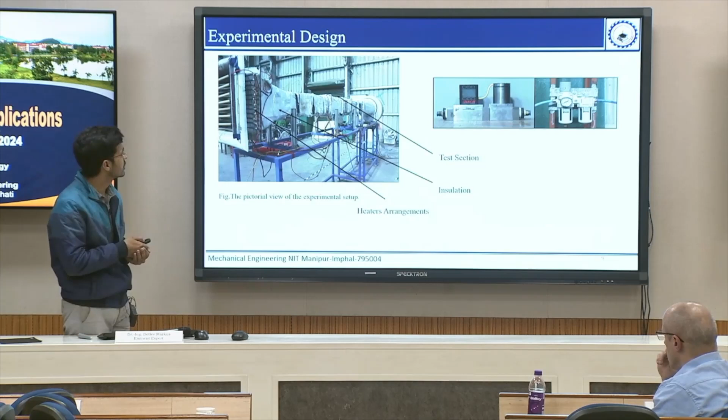No, afterburner, as you can see. I need to go back. This is the afterburner, you can see here. This portion is what we are actually focusing on.

We have calibrated our thermocouple before using it with the IR camera. That is what I am asking, the process of how you calibrated. So first we calibrated our thermocouple.

We used it based on the temperature range. Our temperature range was close to 60, so we used the T-type thermocouple. These thermocouples are basically held inside the plate. The plate was a nylon plate, and using a glue which we call non-thermally conductive glue, we inserted the thermocouples through a pinhole.

We focused the IR camera also through the IR window, recorded the temperature, and measured the thermocouple temperature as well. Based on that, this is the comparison we have done.

I think what was the exposure time for this IR camera? Is it instantaneous temperature or steady state temperature? Once the system reached quasi-static conditions, then we started our recordings.

In that case, that much deviation should not arise, because if both are at steady state, their temperatures should really match. No, deviation will come because the thermocouple will have some error or uncertainty, and the IR camera also has some uncertainty. Actually we are measuring in the flow, so that way deviation will come.

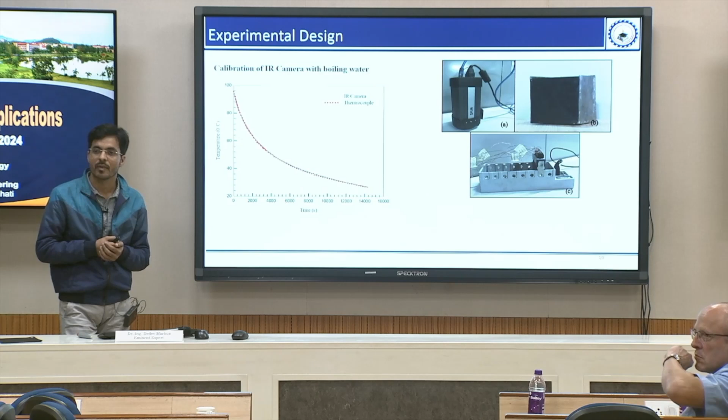You have done some experiment, I think. We placed our setup like this. The plate was kept like this, and in that plate we were injecting the coolant through it, under cross-flow condition, and the main stream is flowing, which is the heated air.

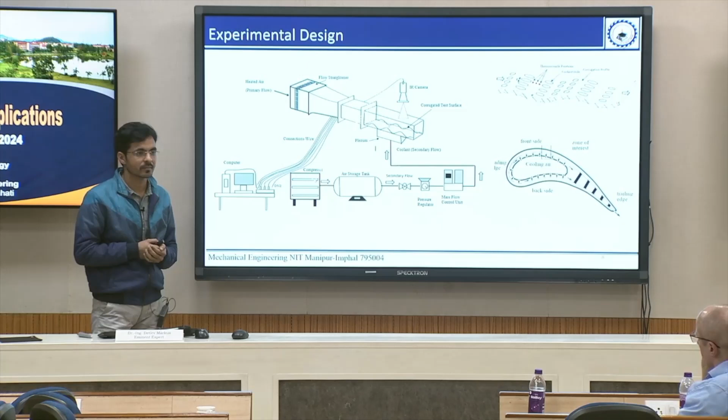Then I think it was slide number 6. So here you show the injection angle. How is it defined? It's the angle between the main stream and the secondary stream, measured with reference to the plate.

At which position? This is for the flat plate. The position is where we have a lot of the holes, and this is the angle. So on the right we can see it maybe better, between the counter-rotating vortex and the surface.

So at which position in this counter-rotating vortex are you measuring? In the center, at the bottom, at the top? Basically this is where the counter-rotating vortex appears.

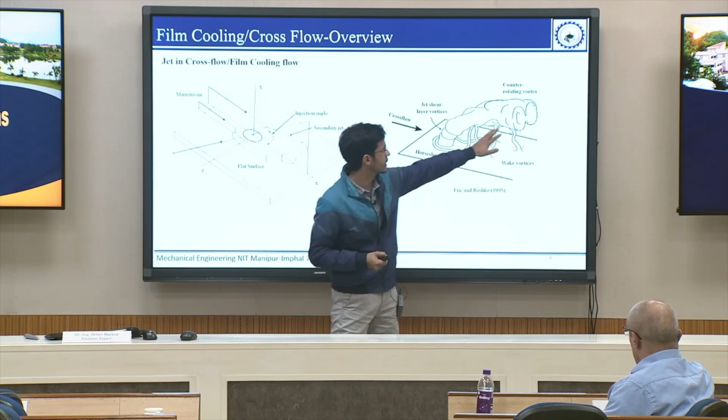Yeah, but how would you define the injection angle? So this is the angle between the main stream flow direction, which is parallel to the flat plate, and the secondary flow direction. So this is the angle between these two. Okay, it's on this line.

So that means if you change the injection position, the angle of the nozzle, it would also change this injection angle. Yes, if we change the secondary stream position, meaning the angle, then the penetration will change.

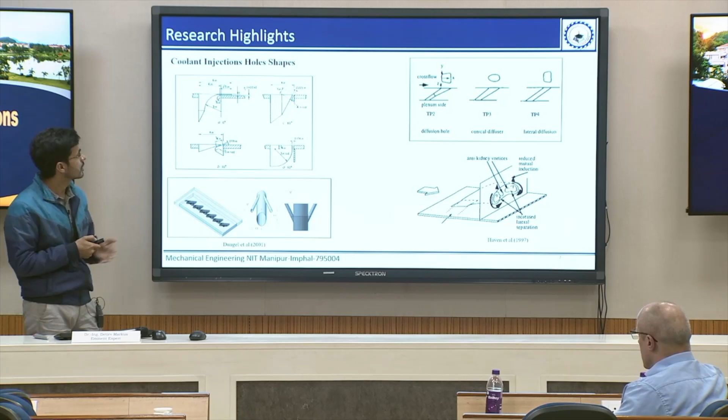On the next slide, you have shown the variation of the inlet shape. Does this not also very strongly influence, not the injection angle, but at least the mixing? Yes, but there was a significant reduction in the strength of the material, so that was obsolete after some time. So it was the beginning phase of the film cooling.

Maybe can you continue? So flow without heat transfer means you have not used heated air. Yeah, we are not using the heated air.

So you see, you have done this experiment not in Germany, so we seldom have 30 degrees Celsius ambient temperature. So it's warmer here in India than in Germany. Yeah, we have done this experiment at Manipur.

So what is the maximum temperature of the heated air you can reach? Actually, through our heater, we will be able to heat up to 62 degrees centigrade.

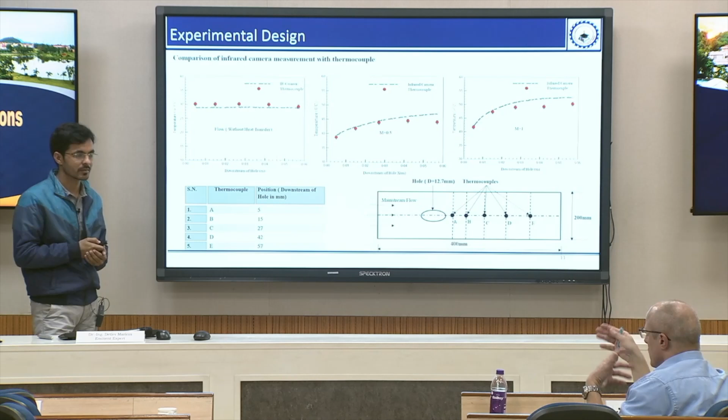So when you look at your slide number 4, where you talked about a temperature of 2000 something Kelvin, how can you compare your results with the conditions in an afterburner? Actually, for the validation, we have used just this experiment, and numerically for the parametric study, we are going for the high pressure and temperature. Once we validate the model, then we go for the higher.

So you want to use these ambient condition experiments to optimize your numerical setup and to validate this? Yes. Okay, at low, basically low density ratio.

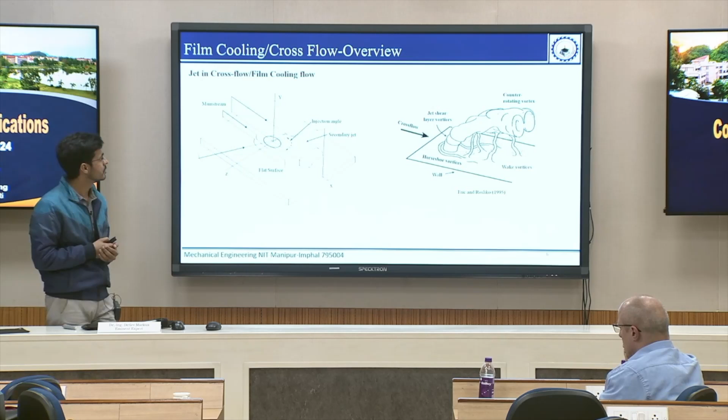Can you show slide number 11 again, please? You have here Mach number 0.5 and 1. This is blowing ratio actually. In film cooling, it is the ratio of secondary stream mass flux to the main stream mass flux.

So in the second case you have higher secondary mass flow than on the left? No, M equals 1 means both secondary and main stream, compared to this case which has higher secondary flux. Yeah, but the cooling is not so good.

So you have more secondary flux, more cooling flux, but the temperature is higher. Yeah, because at a high blowing ratio, generally there is lift off, the secondary stream is lifted from the surface. That is the main issue with the higher blowing ratio. At low blowing ratio, it will remain attached to the surface. Once you increase it, it will directly penetrate and behave like a jet.

Is this then represented by M equal 1? Yes, it has already been discussed in many of the literature that at high blowing ratio, it penetrates into the main stream. But is this high blowing ratio represented by M equal 1? Yes, you said this is the ratio of primary and then secondary flow.

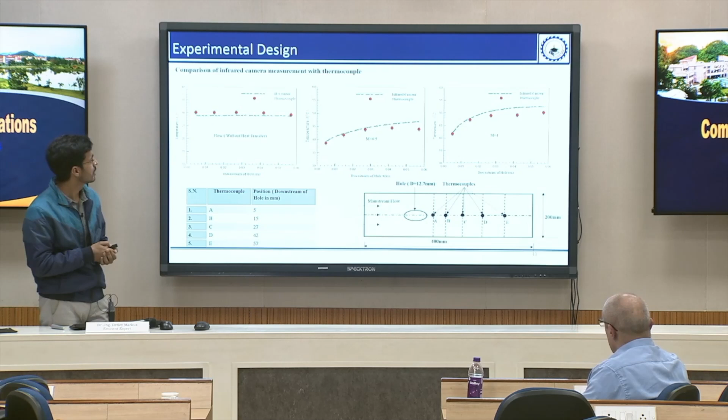Now, therefore, the question is: I don't see any information about the blowing ratio here, or the flow velocity, for which case. Only we have given the blowing ratio information here, and we have defined it in the beginning itself.

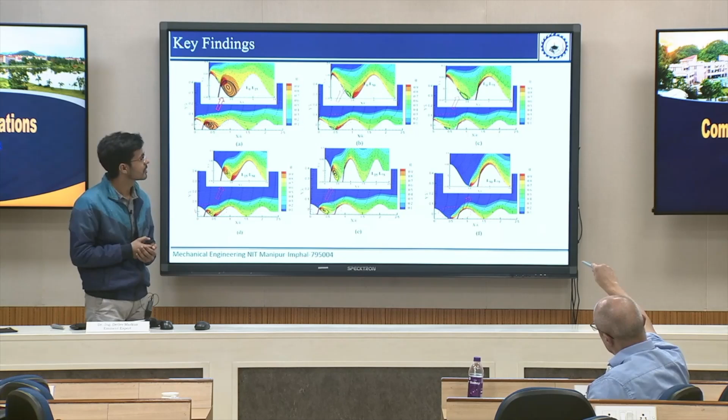Then you have these CFD results, 2D plots. Can you please show it again? This one? When we look at the right at 0.5... which one? A, B, C, D, so there is a white triangle between the red flow. This one? No, it's above here on the right. This one, yeah, and then the other graph.

Actually, we are presenting the non-dimensional temperature, which is generally opposite to the film cooling effectiveness representation. So higher the film cooling, in terms of the non-dimensional temperature, it will appear like red colors.

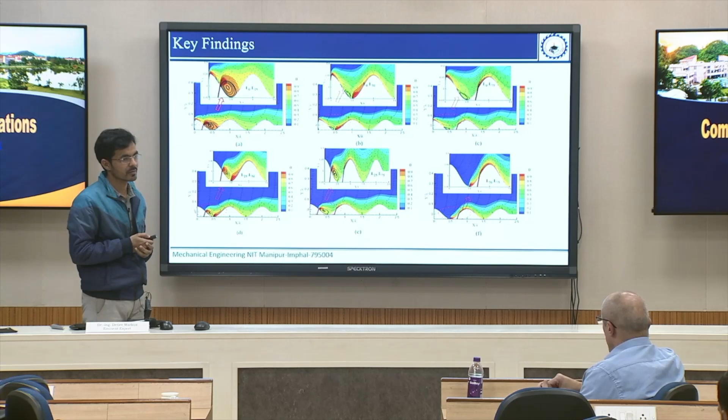Okay, so one final question. You have shown also some examination of the thermal stress. So are you working here together with an institute specialized for material science, or how do you want to use this data?

Actually, we are getting some of the CFD results, the temperature profile in the selected domains, and we are just using the temperature we obtain through the CFD. Before CFD we did some experiments to validate the CFD methodology. After that, whatever we get through the CFD, we use the temperature profile for the specified material, which is mainly used for the afterburner, like Inconel 738, using their material properties and the temperature profile as a boundary condition, we try to calculate the thermal stress.

Yeah, so for what do you need this? What is then the usage of this thermal stress? Do you want to change the material, or optimize the material, or is it just additional information? What we got actually is that in case of reverse injection, the cooling is more uniform, and because of that there is a significant reduction in the thermal stress. So the life of the component will be longer if we do reverse injection. Basically the ultimate aim is to protect the component, so in that way it is better actually.